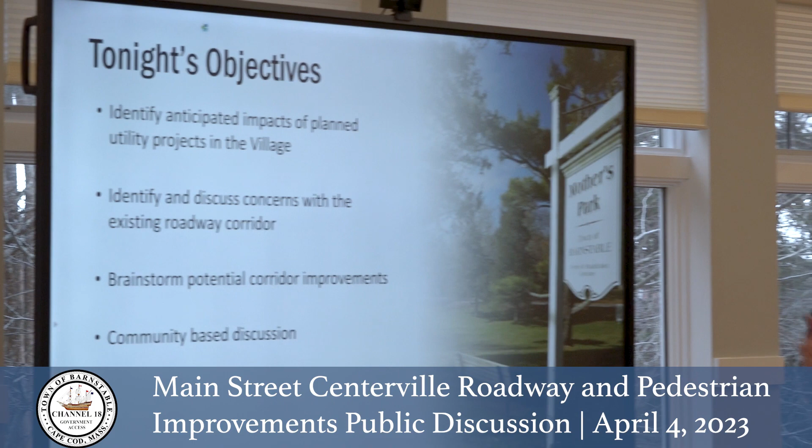So what are tonight's objectives? We're looking to identify anticipated impacts of the planned utility projects in the village, to set the groundwork for why we're having this conversation. We'll identify and discuss concerns within the existing roadway corridors in various areas where we see technical issues, and brainstorm potential corridor improvements to see what the corridor looks like after a utility project, and how we want the village to look moving forward. We view this as a community-based discussion. We're all town staff, we live in the community, we're interested in the community as well, and you obviously all do too. So we want a community-based conversation tonight, focused on what Main Street and other areas in the village will look like after this construction happens.

A couple things we're going to stay away from tonight, to keep the conversation on track. We're going to talk a bit about Park City Wind because that's driving a lot of this conversation, but I'm not here to debate the Park City Wind routes. There've been debates about that, and decisions made by Avangrid, which is why we're having conversations about the routes we'll go through in a minute. Also, I don't want to get into Park City Wind's financial status or project status. Frankly, I don't know all the internal details — my understanding is there's a lot of speculation in the media. My understanding is they're on track to start construction in the fall of 2024, that's what they're telling us, so we're prepping in advance of that. Those are the assumptions we're operating under tonight, so I appreciate if we can stay within those assumptions.

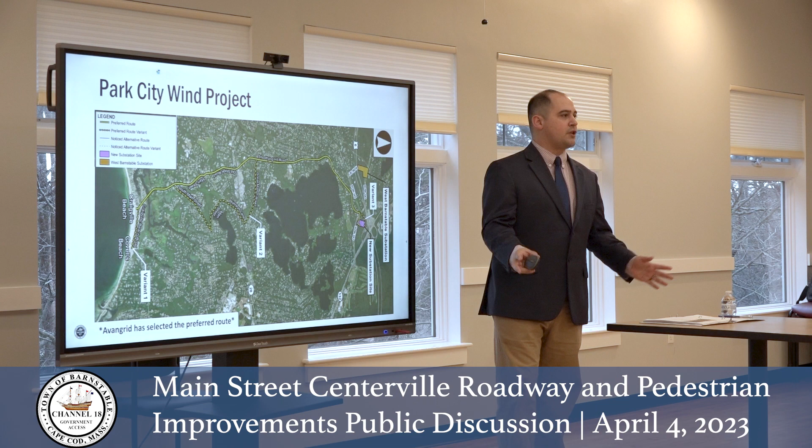Similar to the Vineyard Wind sewer expansion, which is ongoing right now and getting close to completion of construction, the town will be prioritizing sewer expansion along the route for a couple of reasons. One, there's technical coordination issues that need to be worked through - we'll talk about that and show some figures. But there's also cost savings and limiting time of disruption by coordinating projects with developers such as this. Ultimately, the wind developer is going to be required to pave all the roads at the end, which saves the town quite a bit of money, because otherwise we'd have to pave it ourselves.

Quick overview of this project: the area in purple is what we'll be sewering as part of this specific project in coordination with the Park City Wind project. So it's the route we just talked about. There's also a spur up Main Street heading up Phinney's Lane towards 28 in the Mothers Park area. That needs to be done as part of this because ultimately the sewer system can't function without that leg being installed, so that'll be done as part of this effort.

Quick overview: it's 5 miles of new sewers that'll be installed as part of the project, 6 new sewer pump stations, about 350 properties along that route that'll be connected at the end. It's being designed in coordination with Park City Wind. We anticipate the construction funding to be appropriated as part of the upcoming fiscal year capital budget. It's about a $30 million sewer expansion project, a large project. We're expecting to start construction in spring of '24, trying to advance construction prior to the Park City Wind project commencing in order to stay ahead of them and properly coordinate work. We're expecting it to be about a 2-year construction project.

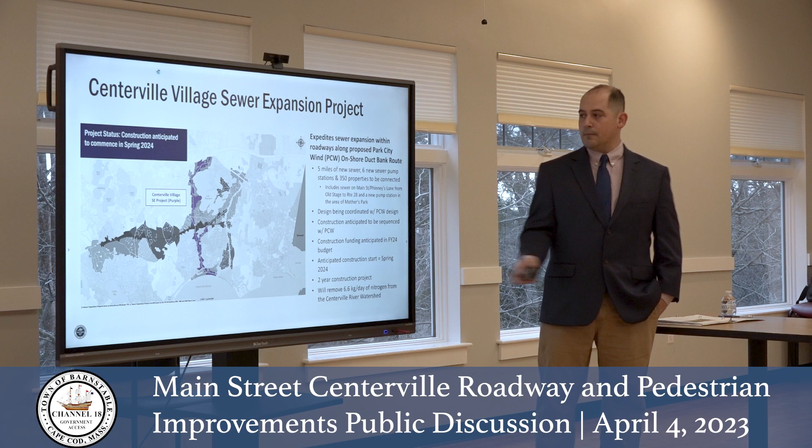Talking about construction impacts, if you were at the presentation I held a couple weeks ago, you'll remember this slide. The sewer and duct bank construction projects are both major infrastructure projects. The sewer construction is a major effort, requiring deep excavations, 10 to 15 feet deep, in some places up to

25 feet deep, though that's minimized on this project through our design effort. Duct bank construction requires wide construction zones, a lot of equipment, etc. They have to install vaults approximately every 1,500 feet, which are about 9 feet wide and about 30 feet long. These big vaults require cranes to put them in, happening about every 1,500 feet in order to pull the cable at the end of the project. I'll show some pictures of those in a bit, but those are big efforts.

There are multiple contractors that have to be coordinated along the route. So that's something we spend a lot of time doing back in our office, making sure contractors are speaking to each other and coordinating efforts to the extent possible, trying to minimize coordination issues.

Trenching will occur within, as you can see here, large portions of the roadway, portions of the shoulders, portions of the sidewalks. So there's a lot of construction ongoing.

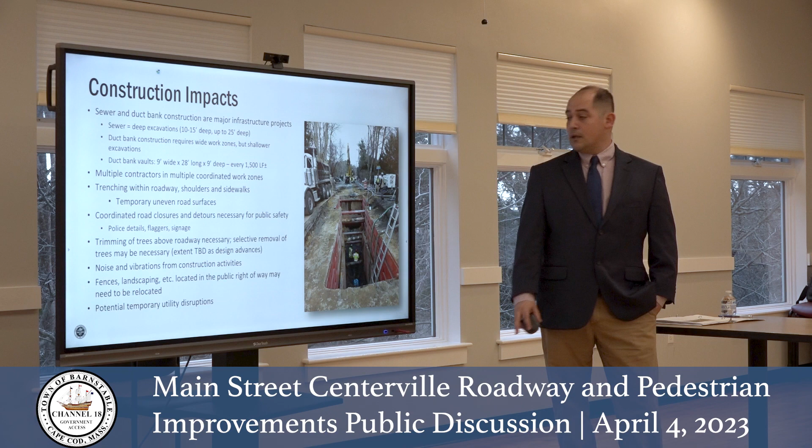And then potential utility disruptions. When you do a lot of digging, you can hit things that require a water shut off for a short period of time, or a gas shut off for a short period of time, in order to fix something that was unintended or something that may have been intended. So we deal with that as well.

So what does the coordination with the wind developer look like? A common misconception I've heard through a number of these conversations is that the sewer and the duct bank all go in at the same time in the same trench - one hole and we're done. Unfortunately, that's not the case.

There are a number of different contracts. We have a private wind developer who's installing a duct bank, and we have the town who is installing a sewer. They're not installing the sewer for us - the town is doing that.

It's with public dollars, therefore we need to publicly bid it. We can't just select a contractor. We have to go through a public procurement process, so there are inevitably multiple contractors. It's a different type of work too. The duct bank construction is very specialized, and the sewer construction is different due to depths, so you have different crews. There end up being multiple efforts in any particular section of roadway.

The general sequence of work, and we'll show pictures right after, is that we prepare the area. We go out, mark all the utilities, do any tree trimming needed, and there's survey work to set control. Then equipment shows up and we start digging. Sewer goes first because it's the deepest. If there are utilities in the way of where the sewer is going, we have to remove or relocate them in advance. Then the sewer main goes in.

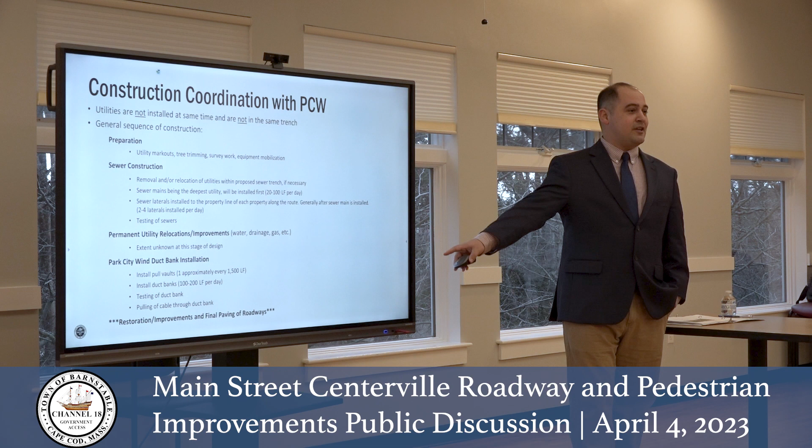Then we start talking about restoration and improvements—that's what we're here to talk about tonight, that last piece, how we put it back together at the end. So that's why there's a whole bunch of stars next to it, because that's what we're talking about tonight.

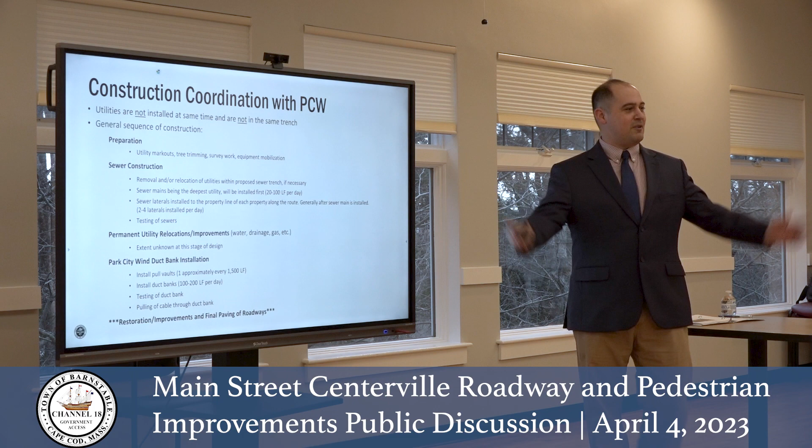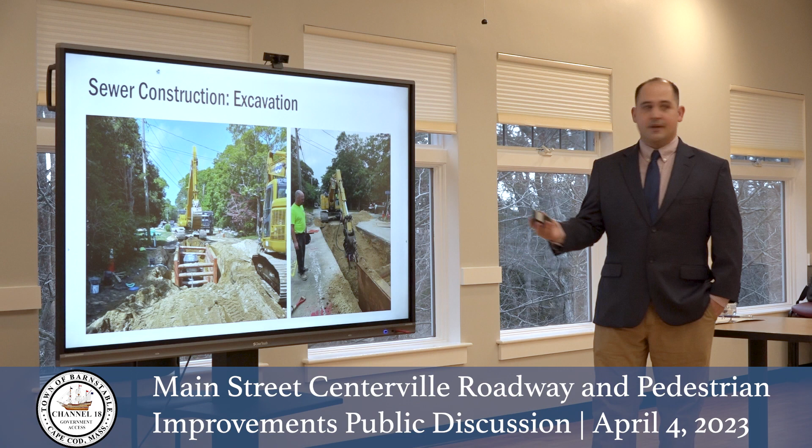Sewer construction—we already showed some pictures, here are some additional pictures of what that looks like. Ultimately, we end up closing the roadways as a result because it's just not safe for folks to be in there.

Once we're done with the sewer construction, we temporarily pave. Every Friday, we pave the trenches done throughout the week. That's in our contracts, and at the end of each day it's all backfilled with gravel laid down so there's a base to drive on—a drivable surface at the end of the day. If there are rain events, the contractor is responsible for fixing any potholes or puddles that develop; they're contractually required to deal with that. But ultimately, on Friday, this is what the road looks like at the end for the weekend.

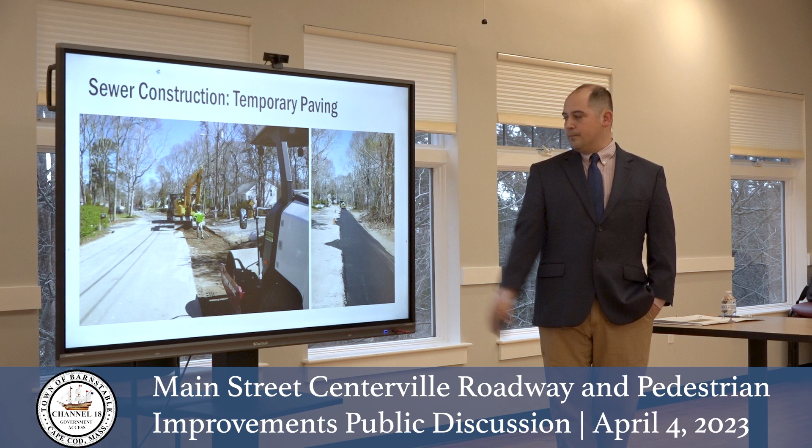And then we talked about the duct bank construction. On the left are those pull vaults - big concrete vaults that need a crane to put in. Fortunately, there's only a handful of them along the route, about every 1,500 feet or so.

This is what the duct bank construction looks like. They install about 100 to 200 feet of duct bank a day. They dig a 100-foot hole that's about 6 feet wide and 6 feet deep, install the trench boxes, install a bunch of piping in the proper arrangement, then backfill it with concrete so it's encased - that's what's called a duct bank. Then they backfill ultimately all the way up and put the road back together.

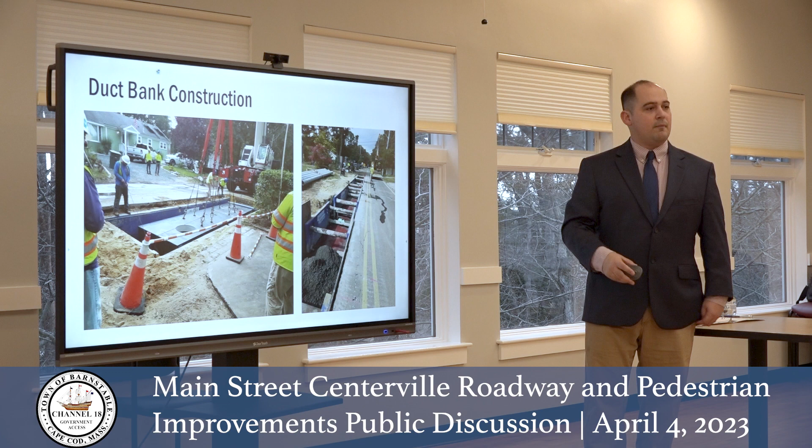Then they come out after the road's all back together and pull the cable through the duct bank. This was that operation down on Craigville Beach Road earlier this year. Cables are huge - 3 to 4 inches in diameter. That's why you get that big hose reel, because to pull the length of cable, about 1,500 feet between each of the vaults, they need that size. So they end up being oversized loads, which means we need escorts to get the reels to the locations, and many times we have to close the road to do this as well.

And then you have final paving and then restoration, right? This is just final paving, obviously, but then there's also restoration, and that's really what we want to talk about tonight.

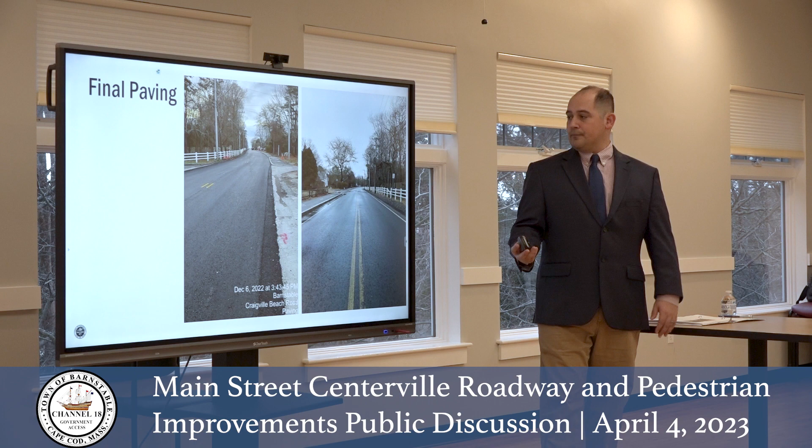It's an area we're all familiar with, Main Street, Centerville, right? So when I'm talking about the Main Street corridor tonight, I'm basically talking about the area from South Main Street to Old Stage, which is the section along the Park City Wind Route. Yes, there is the spur of Main Street that goes up to Mother's Park that sewer will be installed in as well - certainly on the table for conversation - but when I'm talking about the corridor, this is what I'm focused on for tonight, just for reference.

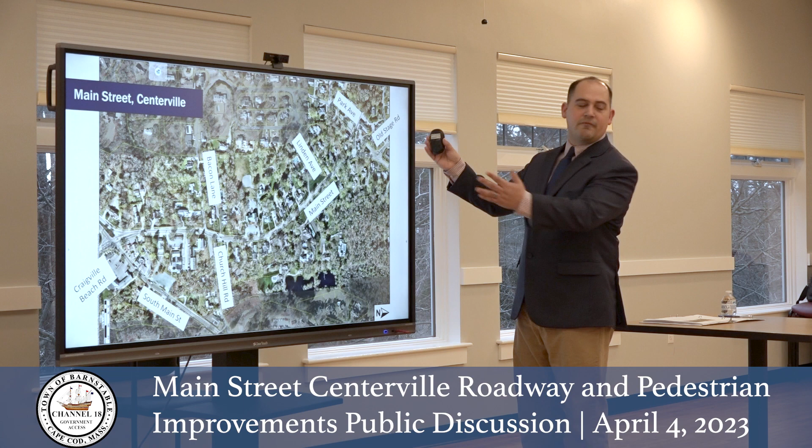So for perspective, north is this way, Craigville Beach would be heading in this direction, Four Seas intersection, Old Stage intersection.

So just an overview of the corridor. We have a station set up. We want to collect some information from folks as to what you all see as concerns, what you'd like to see improved perhaps, what you'd like to see remain, what you don't want to see, right?

So going over anticipated construction impacts specifically for the Main Street corridor, because we've had a lot of conversation about this - a lot of the things we talked about apply here, but we want to specifically go through each of them. There's some trimming of trees - we have to trim above the roadway. Trenching will occur throughout the roadway, and potentially into the shoulder and sidewalks.

Obviously temporary paving, we talked about that. Every property has to have a sewer lateral. If you average the frontage in the area, there's about 100 to 150 feet or so per property, roughly - in some areas it's tighter than that. But every one of them, we need to put a pipe from roughly the middle of the road to the property line, so it'll cross the sidewalks - there's a trench line to go across the sidewalks.

Water main relocation - I alluded to this a little earlier, and we have some pictures on the next slide. As we're looking at the congested corridor that will go together, it really looks as though the water main will need to be relocated. Frankly, it's old and probably should be relocated anyway. In conversations with COMM Water, it's ultimately going to need to be upgraded at some point, so this is probably the rational time to do that. And frankly, given all the work going on, and you'll see horizontally there's really just not enough space to do everything without relocating it. So we're expecting this will happen, though that decision has not been made yet.

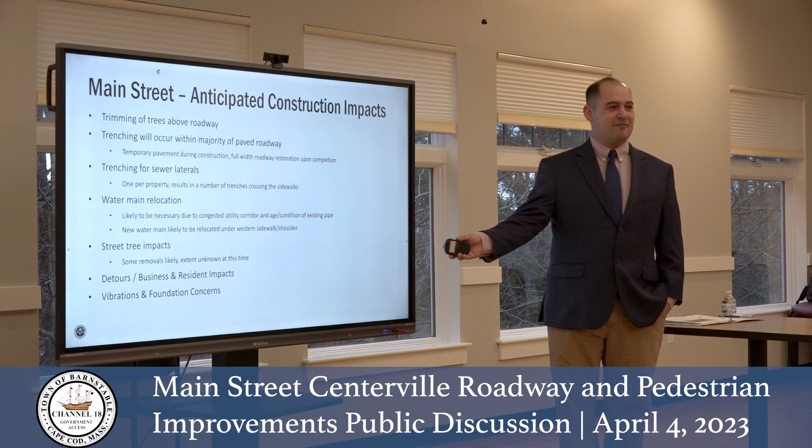Similarly, this is the rec building property, just for reference - same concept, sewer in the northbound lane, duct bank in the southbound lane. You'll see here there's a little bit more separation from that blue line. Maybe an area we might be able to keep the water main if we decide it doesn't need to be replaced from a technical perspective. But that's something we're working through as part of the design.

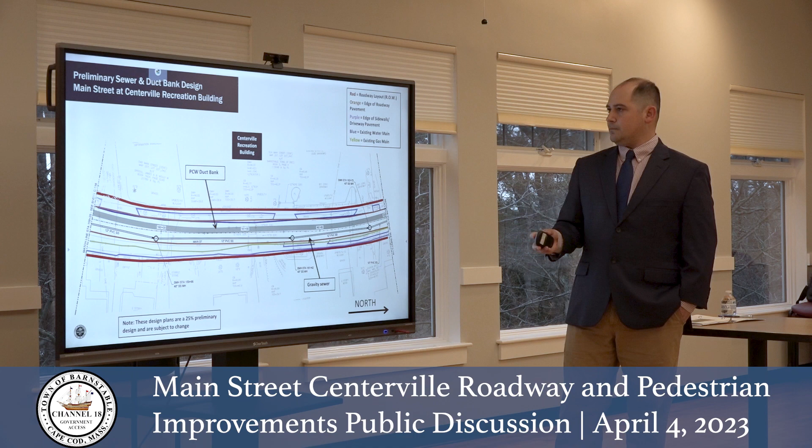So we've made some observations of the Main Street corridor. If you attended the conversation I hosted via Zoom maybe a year and a half, two years ago, these are pretty similar - we've also expanded on them a little bit. The top bullet: the existing sidewalks don't meet Americans with Disabilities Act compliance throughout most of the corridor. Certain sections do, but for the most part, it generally doesn't.

They're too narrow in a lot of cases. In a lot of locations, they're failing, as we're all aware of. There are no curb ramps. There are horizontal obstructions that narrow it at certain pinch points, and in some cases they're frankly unsafe. I have a picture in a handful of slides that will show one particular location where I almost broke my ankle walking down it - plus unsafe mid-block crossings.

So all the crosswalks - there's four, as Chuck reminded me - they're all mid-block. What does mid-block mean? It's not at an intersection; it's in the middle as you're driving along, and there's a crosswalk that comes up out of nowhere. That's an unsafe environment to enter the roadway, especially on a main road, but there are things you can do to make that safer. On Main Street, Centerville specifically, many of them are in random locations. They're on curves, which mean there's less sight distance, so there's more of a risk that once you enter the roadway, people don't see you.

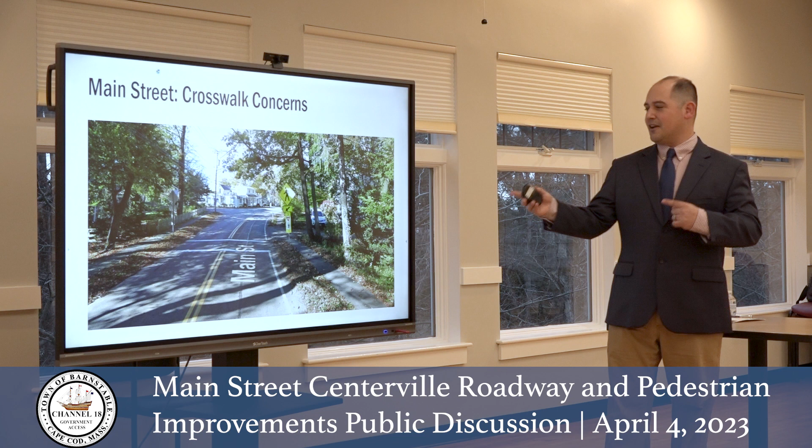Crosswalk concerns—I talked about mid-block crosswalks, and this is one of them. We'll show another one too. This is just south of the old stage intersection; everyone's familiar with the location I'm sure. It's just two parallel bars, not overly visible. On either side it's just grass, not ADA accessible, doesn't meet code. It's also right on the curve, so you come around and don't have a lot of time to see people in the roadway, particularly coming from this direction—they won't be visible until the last minute. It's frankly in a random location; I'm not sure how the crosswalk ended up here, but there's not necessarily a destination—there's residents on each side, and it's a bad spot. So there are a number of considerations here that aren't great. I think with this location, we'd be looking to relocate it to a better spot and make it more visible.

Similar situation here. Again, Centerville Historical Museum, rec building right across the street, right on a curve, not very visible, no curb ramps. Two attractions for sure, right? But probably could be moved a little further south and make it a little bit safer environment and enhanced.

So I'm going to preface this. These are not proposals. These are just the realm of possibilities, right? These are some of the things we've done in town to enhance crosswalks.

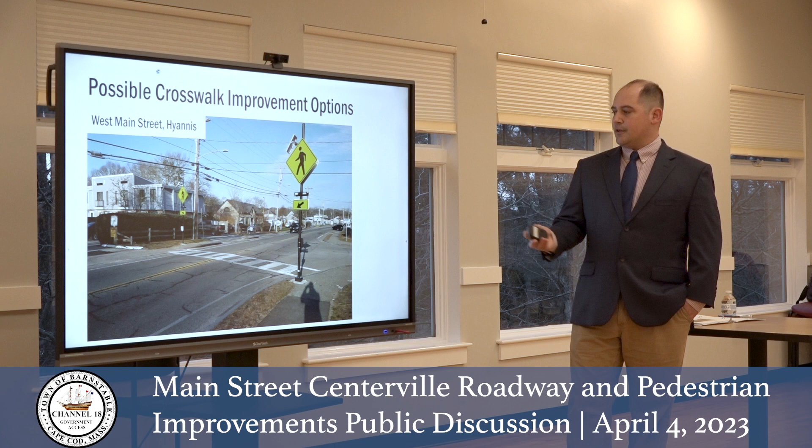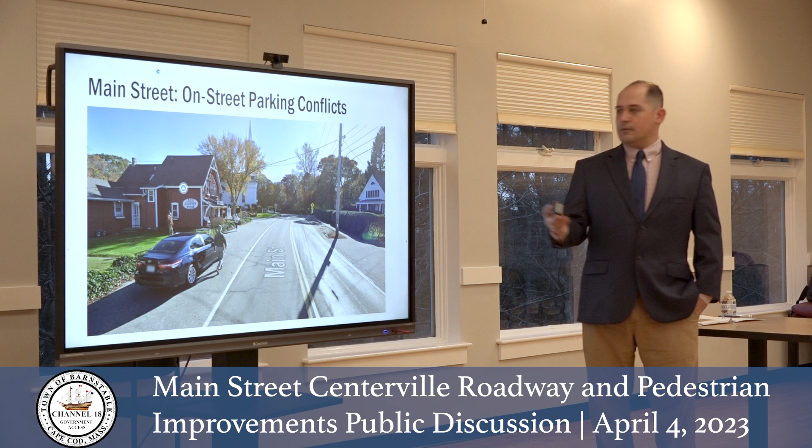The tree survey is the tree survey - there's a figure in the back, in the middle on the back side. You can look at it, take a look at all the areas. Red trees are the ones we found in poor condition, frankly probably should be starting to plan removal anyway. Yellow are fair condition, they're stressed - some of those we just showed are stressed but surviving at this point. Green ones are healthy and in good shape. Just for reference, there's 10 of each for 30 total - just worked out that way.

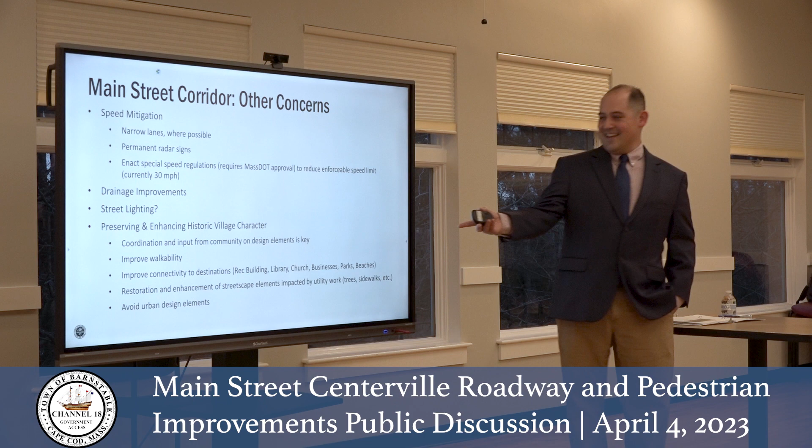Restoring the streetscape elements impacted by utilities - trees, sidewalks, etc. - let's restore them and put them back in a desirable manner. Let's also try to avoid urban design elements, since we're trying to keep a historic character, so that's what we'll aim for with this design.

A couple other locations we want to talk about - there are stations for each of these particular locations as well. First, Main Street at Old Stage.

Really interesting intersection - we have four legs where three are stopped, not really sure why. Right off the bat, I think that's something we can do to enhance safety here. There are some sightline issues with existing trees, so we need to get that right, but there's some thought that needs to go behind it. This northbound approach probably could use a stop sign to help mitigate things. There are no crosswalks, no adequate curb ramps, and no adequate pedestrian facilities here at all, so there's some enhancement that can be done. I don't think we need to rebuild the whole intersection, but there are improvements that can be made to make it safer.

Another interesting area is over here near the insurance building. There's some on-street parking there - not necessarily an issue in itself, but if you're trying to pull out of this road, you can't see past the parking. We've looked at options to keep the parking there but make it so you can pull out a little further and see past it, with some minor geometric changes - something we'd look to incorporate if desired.

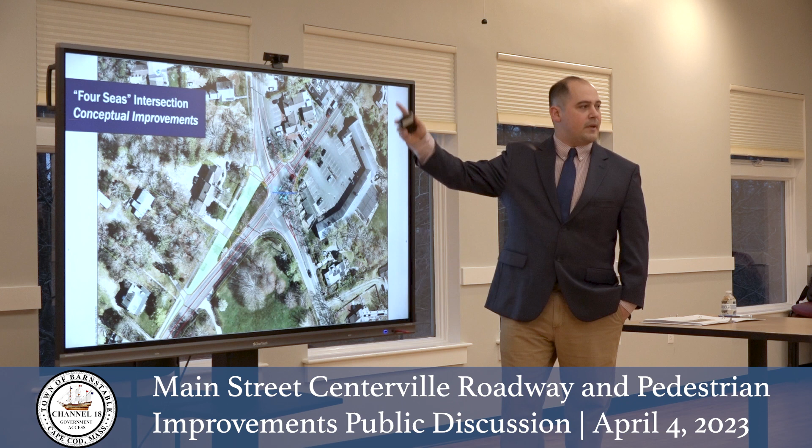And then trying to find ways to add additional pedestrian area here without taking parking spaces. So we got to work through that. May need to do some realignment of the roadway, minor, some narrowing of lanes, but certainly something we want to try to do while we're in this area. And then some new sidewalks in areas where they don't exist. So that's our initial thought here, but obviously want some input on this.

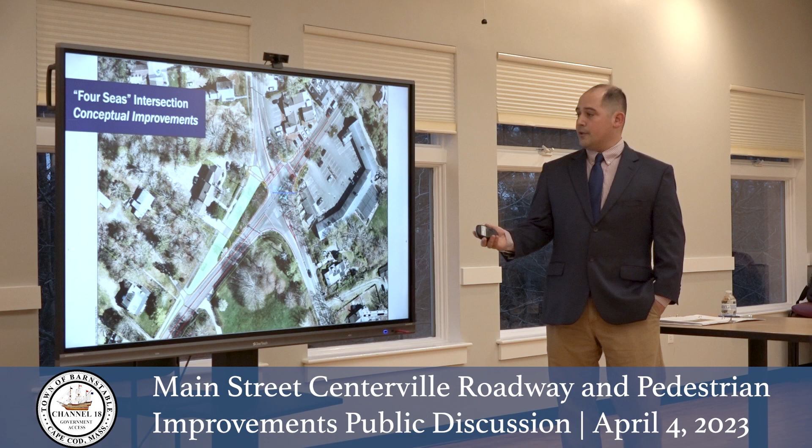Mother's Park. So there's a number of things going on here from a traffic perspective and pedestrian perspective alone, and then there's the sewer aspect, so we'll take them one by one. So Mother's Park Road, this is a kind of cut-through road there that if you're trying to head east when you're going south, you would kind of go to avoid this kind of hairpin turn, right? It's also unsafe because people just kind of speed through it, and there's yield conditions there, informal yield conditions. So it's kind of been a priority of DPW to try to get rid of that road anyway, because we see it as unsafe. However, to do that, you really need to realign the intersection because it's not geometrically correct from an engineering perspective.

In addition, there's the sewer expansion project, right? And Mother's Park, the Mother's Park area is the area where a sewer pump station would need to be installed, somewhere in this corridor here. So the proposal would be to utilize Mother's Park Road for that, and I'll show you what that looks like.

So as part of the proposal, Mother's Park Road is no more. This portion, the southern portion of what was Mother's Park Road, the pavement would be removed. It would be incorporated into Mother's Park. Nice flat area that will be utilized for the park use. In order to get rid of that road, the intersection would need to be realigned in that manner.

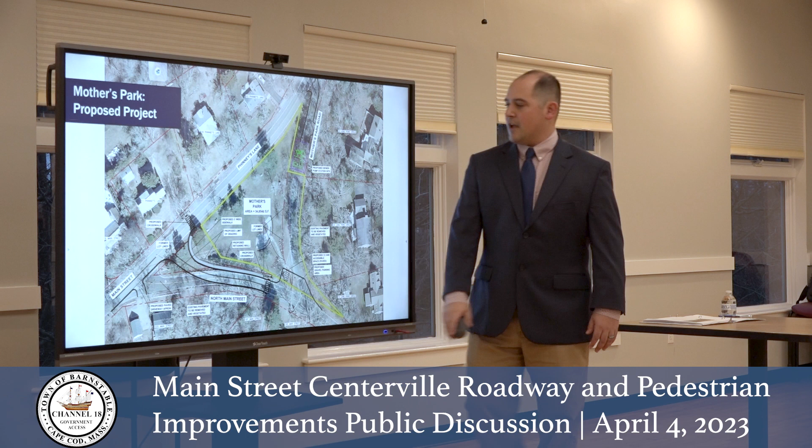One thing I didn't mention is there's really no connectivity from a pedestrian perspective. You have a sidewalk in this location on North Main, and you have a sidewalk on Finney's Lane. There's no way to get from point A to point B. So we would try to make that connection as part of this.

In addition, there's really no parking in order to utilize Mother's Park. So one idea is to install some gravel parking areas in this location in order to make the park a little bit more usable. Ultimately, this would be an increase in the size of the park at the end of the day.

This portion here would need to go away from the park to become part of the road. This portion here would be added. This portion here is kind of a little low point, right? This portion's a flat area that probably would be more usable at the end of the day from a park perspective.

I talked about the sewer infrastructure, right? That's what this purple square is right here. So in this area here, we would propose to install what's called a submersible pump station, so a below grade pump station, a vault that's below grade that the sewage comes into, and then is pumped up to Route 28 to the building that's being installed at the intersection with Finney's Lane right now.

We have some renderings in the back that can kind of show what we expect that to look like. But effectively everything's below grade. You see some hatches, some concrete pads at the surface, an electrical panel and a generator. It can be screened with vegetation.

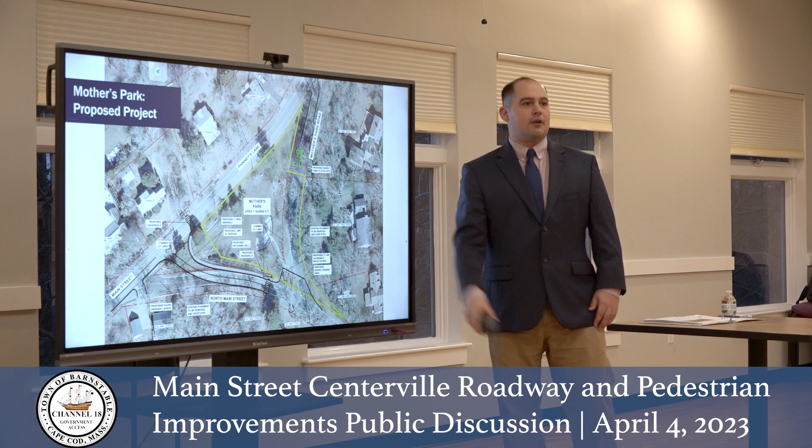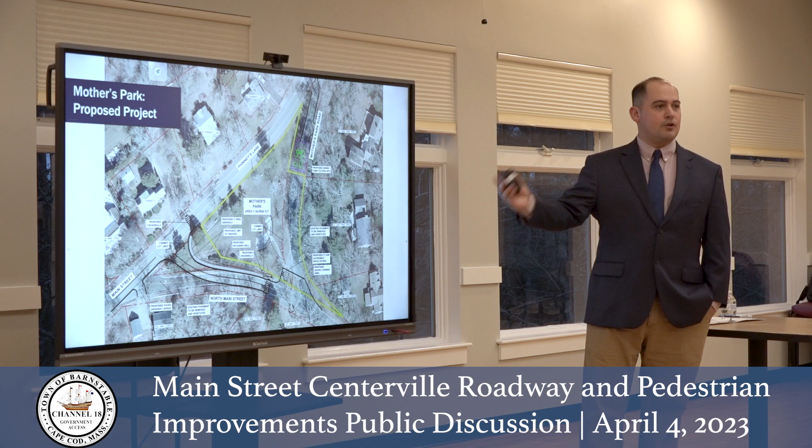So that's the proposal there. We did spend quite a bit of time talking about that a couple weeks ago at the informational session we hosted about the sewer expansion aspect of all this. If you're interested in more information, I encourage you to watch that, or I'm happy to talk in more detail about it.